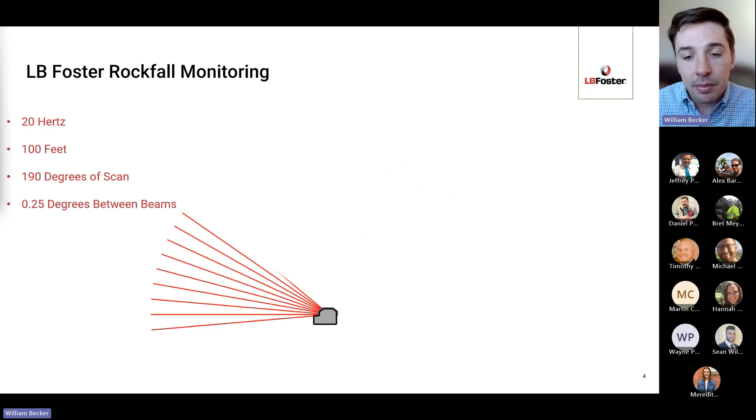What you can see in the animation that's playing is about a 5-degree separation of beams. It's actually 20 times that density at 0.25 degrees between the beams. What we'll do is we'll place this LiDAR next to the tracks in a way that allows us to see completely over the tracks.

But I think it's important to note that when we're talking about the scan area, there's plenty of areas that we're scanning, you can see in this example here, that we might not be interested in. So for example, here we're seeing this potential rock face over here and a ditch over on the other side. But really, we want to be alarming on obstacles that land in the tracks.

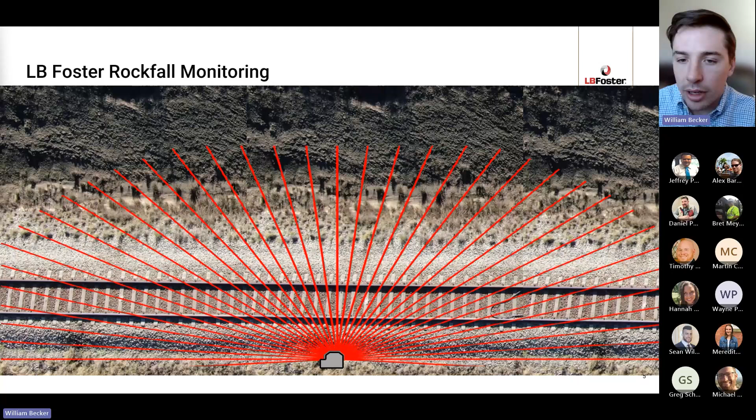So what we do is we take our software and we bound this scan area into what we call our detection zone. And so that detection zone, the way it operates is if an obstacle of a size that it could actually hit your train lands in that detection zone, we're going to send an alarm out on that, and we're going to say where that obstacle was detected in the detection zone so a maintainer can clear that obstacle and resume normal traffic.

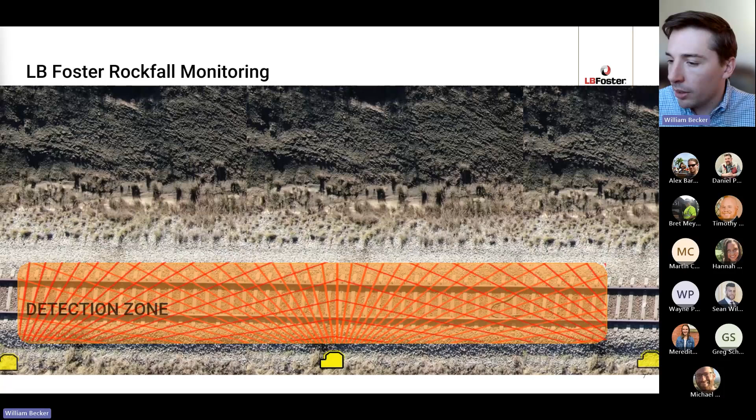Part of the safety case that we make internally is that we'll actually want to be seeing this obstacle from multiple LiDARs at the same time. And so what that looks like, you can see that I've added LiDARs to the left and to the right of this main LiDAR, and you get this redundant overlap of scan beams.

Now, as I said, the number of beams are actually 20 times the amount that is shown in this image. And so you can imagine that the density of these beams is very tight. Any obstacle that lands in the detection zone, we're seeing from multiple angles and can precisely determine that that obstacle's in the tracks and in our detection zone.

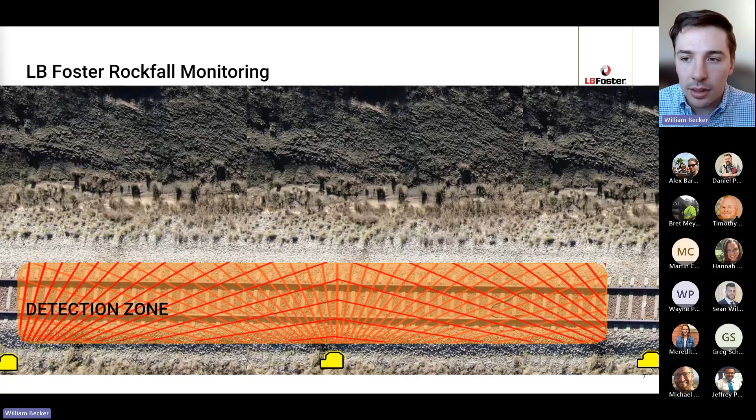So that's just a really quick and brief overview of how the Rockfall monitoring system works. What I really want to dive into today, since this is our second webinar, is some results from a trial that we did at a major Class 1 railroad and a head-to-head between a slide fence and our Rockfall monitoring system. So before we really get into our system, just for those who may not be aware, I want to detail what a slide fence is and how it works.

So when we're looking at a slide fence, there's generally two different types that are out there. There are tension fences, and so these have a high tensile wire that is along the tracks. And when that tension is applied to the wire, let's say a rock falls, it causes tension in these wires. It will cause a mechanical breaker to be tripped, and they know that something potentially has come down and is now caught in the fence.

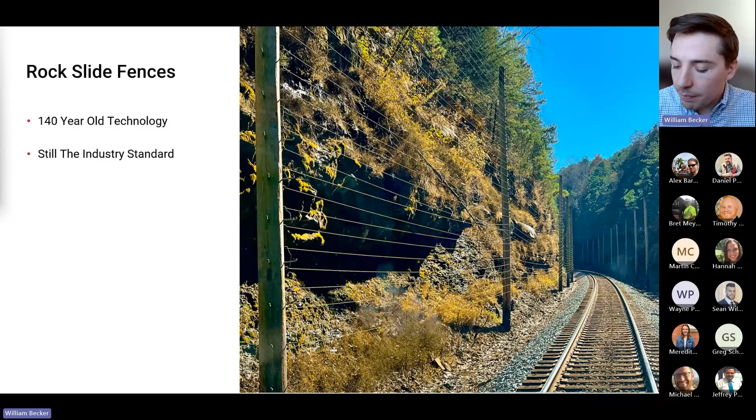So I just highlight that because when it comes to rock detection, this slide fence is the industry standard and really hasn't seen any innovation since it was first implemented. Now, with the slide fences in our trial, we had the unique opportunity to look at the results that we were getting from the slide fence. So we had our system next to a slide fence, and over the course of the year, we ended up looking at how much slow order time these slide fences were accruing.

Anytime that a slide fence activates, the trains in the area need to slow to an approach speed. And the reason for that is that when a slide fence activates, the assumption is that something is on the tracks. Now, that may be true, that may not be true, but to keep trains safe, there needs to be a slow order issued, just so trains are operating at caution and can stop within half the range of sight distance as they approach that slide zone.

So, throughout the year at the one fence that we were looking at, a major Class I had 783 hours of slow order time. And I think a good question you'd have to ask is, how many of those are valid slow orders that were being imposed on the train traffic? So we did an analysis on the alarms that they were getting, and throughout the period, those delay times were caused by 106 alarms. Of those, only one of the 106 alarms was considered a true and valid event.

And then on the other side of that, two of the events that were valid events were actually not captured. And so the slide fence only detected one out of three of what we would consider a valid event, which in our opinion is fairly poor performance when it comes to catching these critical incidents.

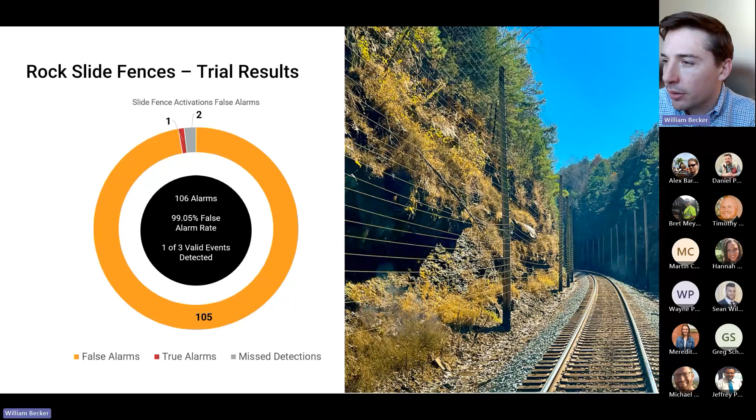Just to go back a little bit on a rock slide fence, one of the real drawbacks, and why these 105 events end up causing your 783 hours of slow order time, is that when those wires break, the slide fence is in an alarm condition until someone goes out there and manually repairs the fence. So that involves someone getting out there, generally in fall protection, getting up on these fences.

It could be a wire all the way at the top here that broke. Let's say a small rock has come down and broken one of these wires. And so sometimes it involves bucket trucks, fall protection, and it can take hours and hours, days and days sometimes, for someone qualified to get out there and repair the fence into working order.

So now I'm just going to go into a little bit of the events that the slide fence missed, and these events were captured in our head-to-head trial by our rockfall monitoring system.

And I just want to highlight that because I think the assumption from the industry before we started putting these results together is that a slide fence was adequately sufficient as far as the safety case goes for detecting these types of events, especially boulders of this size.

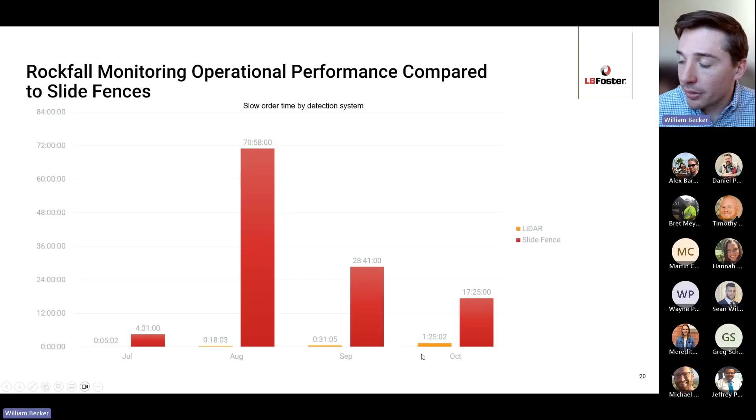And then finally, if we go back, there are a couple of times we are still getting some slow order time. And so as part of our continuous improvement, we were looking to do some software upgrades to have new detection algorithms to reduce some of the few false alarms that we're seeing around birds and fog that are contributing to the couple of minutes here and an hour 25 throughout these months from the LiDAR system as compared to the slide fence. And so, we're hoping to get this as close to zero as we possibly can.

When it comes to that HMI, the HMI screen is actually adding a lot of in-the-signal-house functionality. So what you can see here is that you can see all of your LiDAR at the site. In this example, the site's 7 LiDAR long. And you can see if they're in alarm or not in alarm. You can see the CCTV camera is properly communicating. Any faults, maintenance notifications, all of that can be found on the HMI screen.

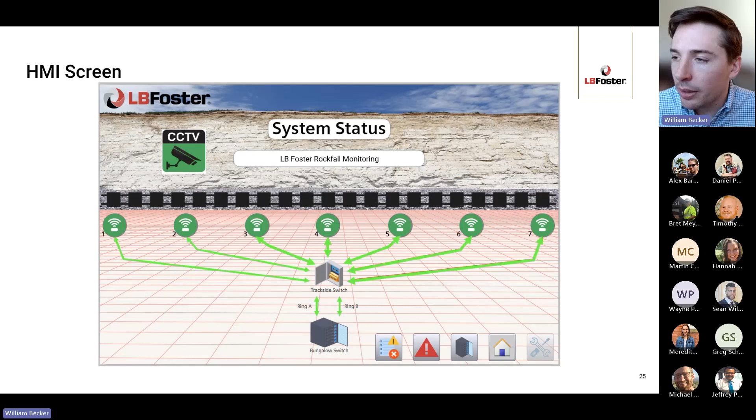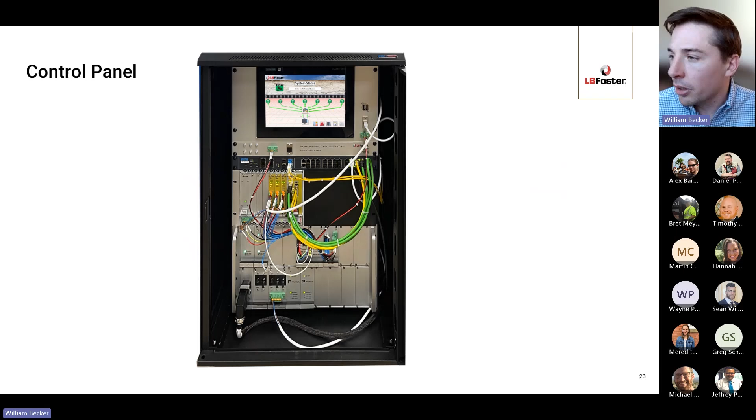The reason why this is nice to have is that before we went forward with this, you can kind of see that on the old control panel, there's really no interface. And so you were having to run a custom piece of software, plug into the control panel, and only then could you see how the system performance is. Now, any signal maintainer that comes in can look at the control panel, see the system status, see any alarms, see any faults. It's much more maintainable from that side.

So another added feature and functionality is on the HMI screen when we're detecting an alarm. One of the pieces of feedback that we got from our customers is that when you have an alarm, for example, you noticed in that second true alarm, you had a lot of rock pieces fall and they went all over the place. Well, it's not entirely clear in our old iteration which one of those rocks is causing the alarm or if they all are. So when clearing the track, what we've added is this little graphic that can be used to identify where in relation to the LiDAR that obstacle is that we're alarming on. And from that, you can remove it, make sure that it's showing clear on your HMI screen, and you know that you've removed the obstacle.

One of the biggest advantages to that is that when we're talking about resetting alarms on rockfall monitoring, unlike a slide fence, the way that that's done is by removing the alarming obstacle. Once that obstacle is removed and the track's determined to be clear, the system will automatically go into a clear condition.

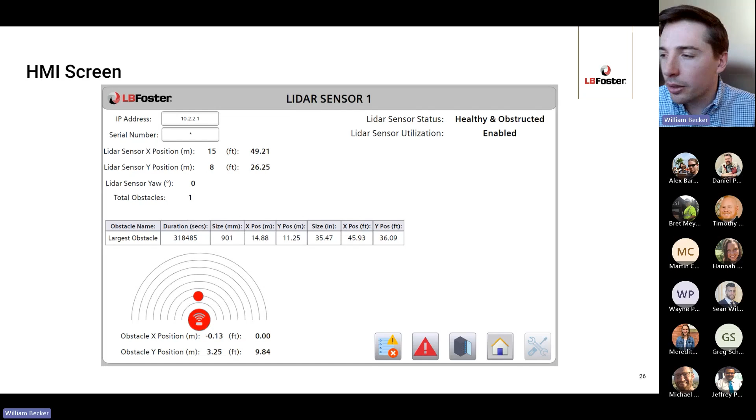So as far as other upgrades that we've made, the system architecture has been upgraded substantially from the original installation. And this is once again from feedback from our customers. So first and foremost, the power that we had been using was all AC powered. And the idea there in the past was that AC power potentially could be used for longer runs. But we have

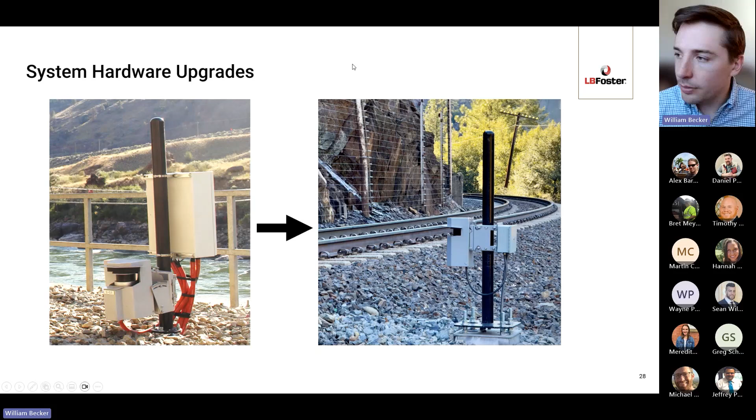And the reason for that is that we have sites where potentially you could have a very large number of LiDAR. It might not be as easy as just looking out of the signal house and saying that it's LiDAR 3 and you can see it, but you may be talking about having to walk down a mile of track. And so the idea is that any alarming LiDAR is easily identified just from a walk down the tracks. You can see that indicator light. So that covers some of the improvements that we've made.

And now I want to move over to the question and answers section. I know I covered a lot here, and I would be interested to hear if anyone has any questions specifically around the trial results or any questions about how the system operates. And I don't see any questions yet, but if anyone's got anything, feel free to throw them in the chat there.